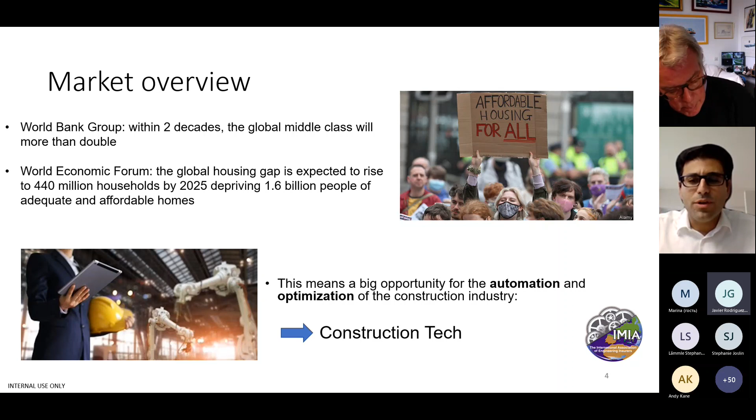World experts expect a huge surge in demand for housing in the next decades. In just the next few years, the world needs 440 million new homes. This represents an immense opportunity for the construction industry to refresh itself and join other sectors in the era of automation, digitization, and optimization. Thus, the new buzzword, construction tech.

Construction tech is particularly tangible thanks to the new workforce entering construction, a generation of workers that are tech-savvy and eager for new innovations. In 2018, more than $1 billion was invested globally in construction tech, according to Jones Lang LaSalle. In the past few years, investment in construction tech by far outpaced overall tech startup growth.

We are here talking about artificial intelligence, big data, building information modeling, bricklaying robots, drones, and our topic today, 3D printing.

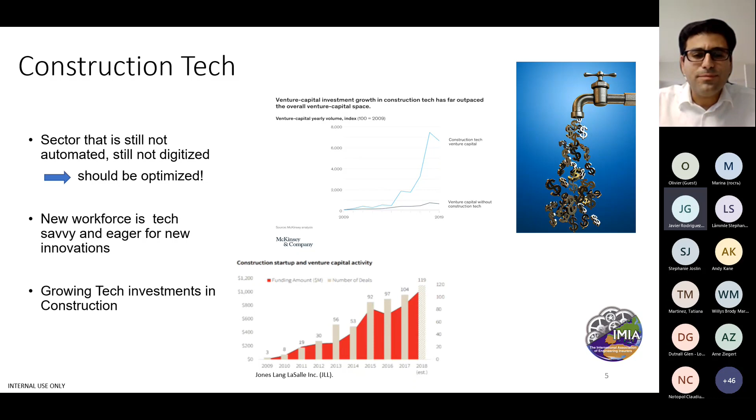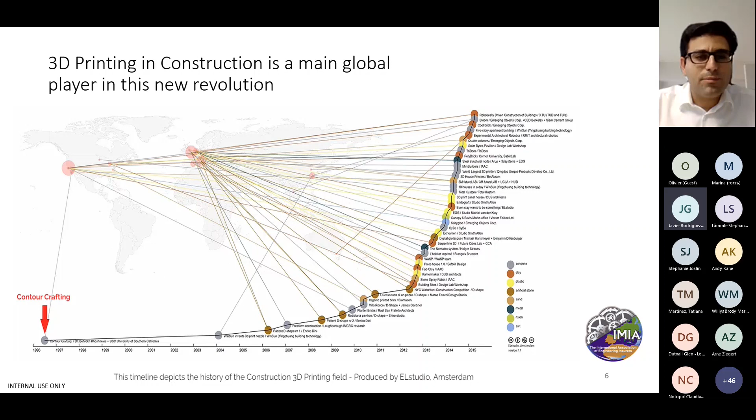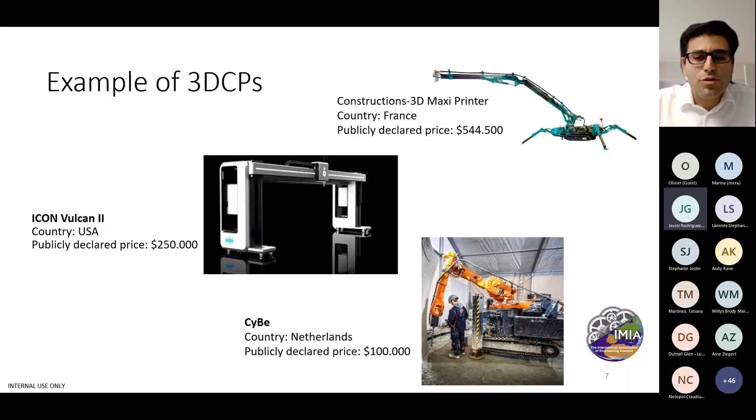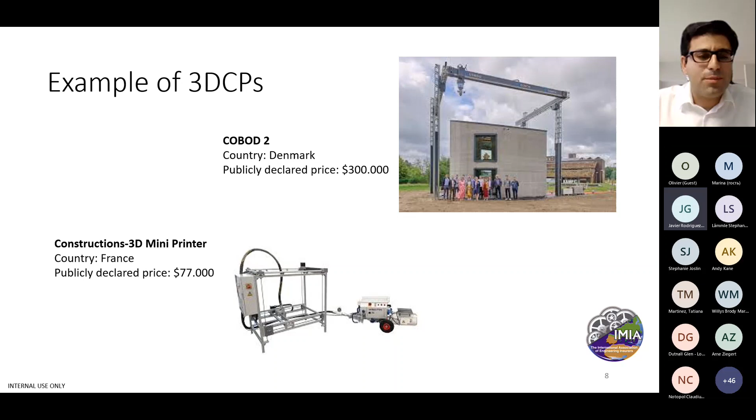So as one can see, there's a lot of interest and activity in this space. However, it is not without its challenges. I'd like to touch a bit on some of these challenges here, which are typical for any new type of innovative technology at its nascent stage.

As we've seen in previous slides, those machines are still expensive for the average cement subcontractor, and that is maybe why this new technology is not immediately adopted by them. These challenges are being addressed, of course, and each day there are improvements in the 3D cement printing space, but it is still not problem-free.

In the next few slides, I'll address the issues of cost saving, and I'll do that by first comparing 3D printing in manufacturing to 3D printing in construction.

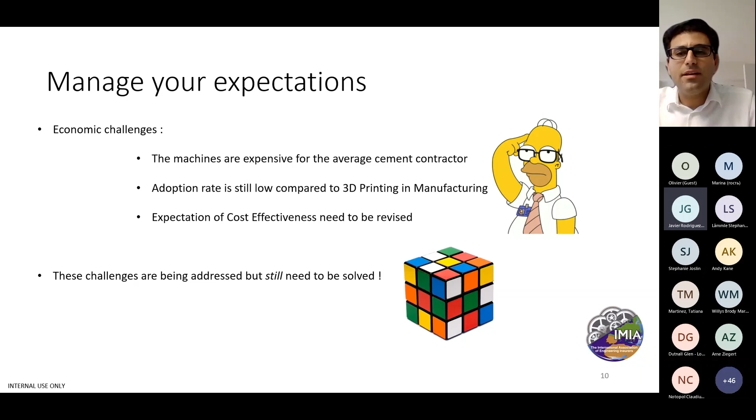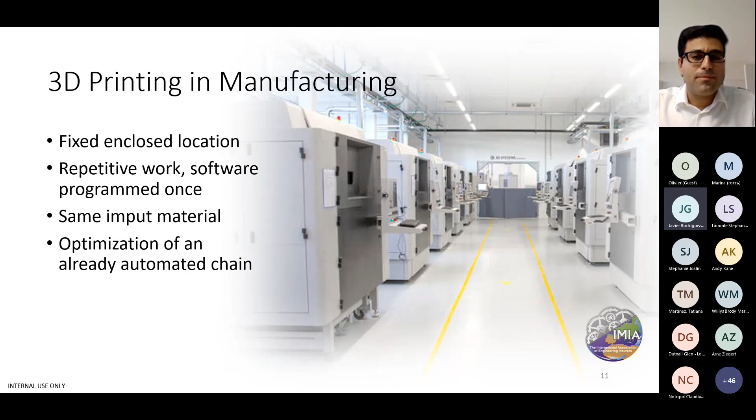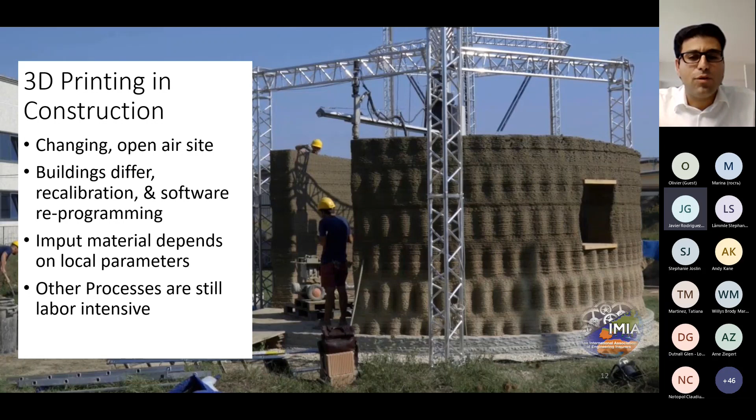Well, that is not the case for the construction industry. First of all, the printer would have to be transported and set up over and over again for every new site. It's out in the open, in rough and rugged conditions, and vulnerable to nature. For each new structure, the printer would need to be recalibrated and the software reprogrammed. Only the cement pouring part is automated in construction; a lot of the other processes are still not automated and still need human involvement. Therefore, optimization is still a few steps away.

Theoretical research on cost and time will tell you that 3D cement printing is extremely effective. Unfortunately, some current academic research, but especially online articles, are filled with hyperboles and sensational rhetoric.

I talked to the customer relations managers at Cobod, a more serious and successful 3D cement printing maker, and they admitted right up front that it is still more expensive today to print cement than it is to pour it. He joked about how some of their competitors falsely advertised the cost and time effectiveness of 3D cement printing, and then got flooded with phone calls from people asking them to come over for the weekend to print an extension of their home in the backyard for $4,000.

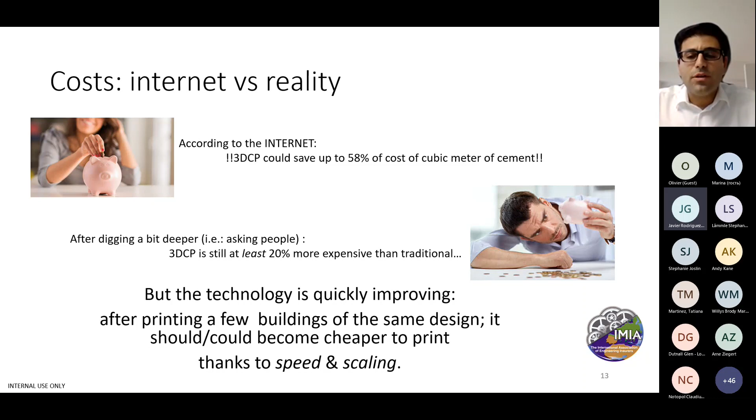The technology is obviously still not there, and this misinformation hurts an otherwise healthy, growing new technology that just needs its time to properly develop and find its space in the construction sector. The technology is still improving, and after printing several identical structures of the same design, you start benefiting from economies of scale, and it should become cheaper to print than it is to pour cement.

This graph shows how steep the interest in 3D cement printing is developing. Despite the challenges, it's still quite a sensational growth. Cobod, one of the more serious companies building 3D cement machines, which was able to already have a cooperation with GE to print wind turbine towers, is receiving on average around 1,000 inquiries per month. He admits that the hit ratio is still very low, around only 0.5 percentage point conversion rate. However, the interest is definitely out there.

As it is typical for successful startups to have such an exponential year-on-year growth, especially in their early stage phase, they are selling about 8 times this year what they sold last year.

I believe that in the short and medium run, 3D cement printing will give birth to a new category of specialized cement subcontractors, those that manufacture parts of the structure off-site. I use the word manufacture here to draw a parallel with the manufacturing companies that have so successfully adopted 3D printing. The next long-term step would be the widespread adoption of 3D cement printers by the average cement subcontractor, once it really becomes cost-effective.

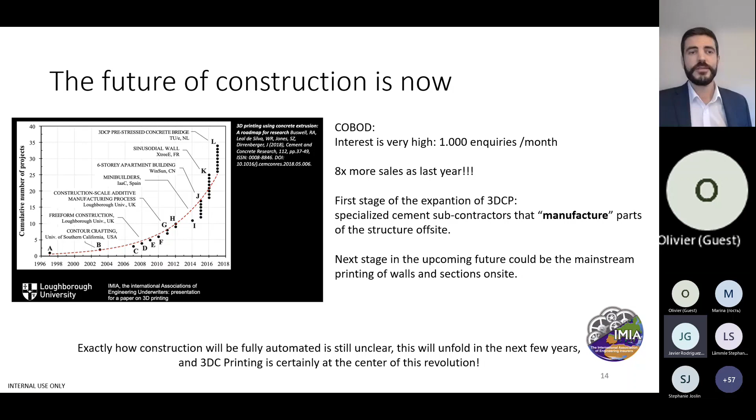When we first started researching, we saw a lot of different definitions, and it was a bit confusing how to actually define construction 3D printing. So we decided to go high level and found an ISO, an international standard on 3D printing, which obviously covers more than just construction 3D printing. It covers all types of 3D printing. There's a definition there, which basically talks about deposition of material.

Also defined is additive manufacturing in that paper, which talks about joining material. We found actually that these two terms are used interchangeably. So a lot of the times when we're talking about 3D printing, maybe something's not being deposited, but it's being joined, actually we're talking about additive manufacturing. But even this ISO standard itself talks about the term being used interchangeably.

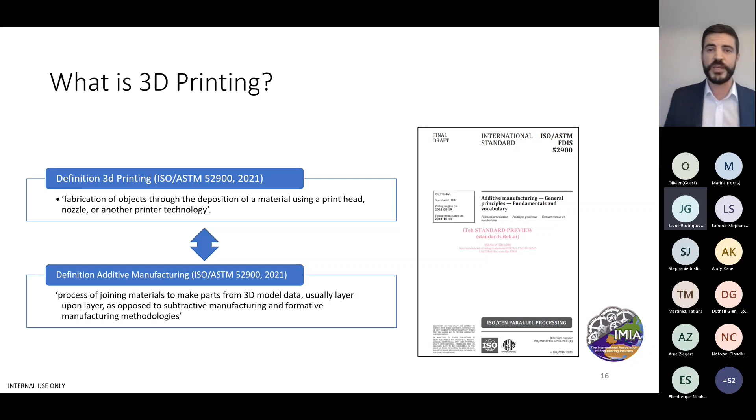That definition helped us out, but then we saw lots of different types of 3D printers and materials, and even just in the group discussing it, we had a hard time trying to fit in the different pieces. So the next slide shows us a bit of an overview of how we classified it. There's no general agreed standard how to classify it, but we found basically 3 main areas.

You can either classify 3D printing for construction by the materials, so either something that's cementitious or aggregate based, plastics or metals, or you could classify it by the printer type and setting - meaning is it a robotic printer, is it a gantry printer, is it on-site or off-site in a factory. And then finally, the last classification we saw was the technology type of the printer.

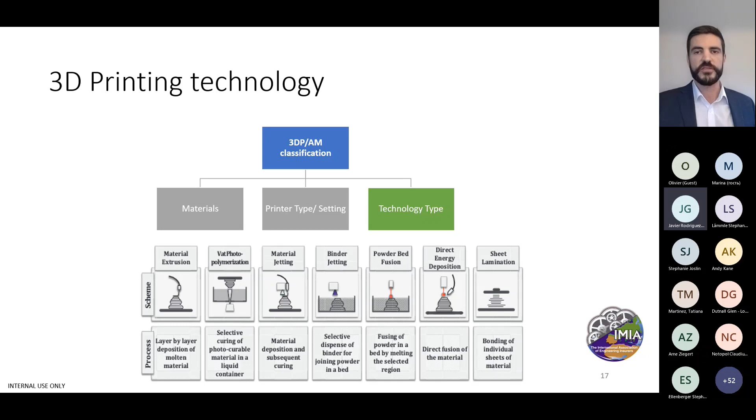One of the main areas we see in construction 3D printing is material extrusion. There are also different types of printers that we can classify based on the materials. The primary one we're looking at here is cementitious or aggregate-based materials, so it doesn't have to necessarily be cement. It can be clay, or even organic material used to form that extruded material.

One point there: it's a term that was coined back in the early 1990s, contour crafting, which relates to when the material is extruded from the print nozzle, and there's a trowel you see in that picture, that yellow bit of plastic, that then forms the external surface of the concrete. But there are countless other types of extrusion printers out there, and each company has their own setup and design. That's the one we're going to talk about mostly today.

Some other extrusion printers use polymer and different types of plastics, and a term there is big area additive manufacturing. Basically, you can think of it like those small 3D printers you see in shops—these are just giant versions of that, extruding thermal melted plastic to get your extruded material for construction. Generally the size here is also limited, so it'll be precast in a factory, then transported to site, maybe used for facade elements and the like.

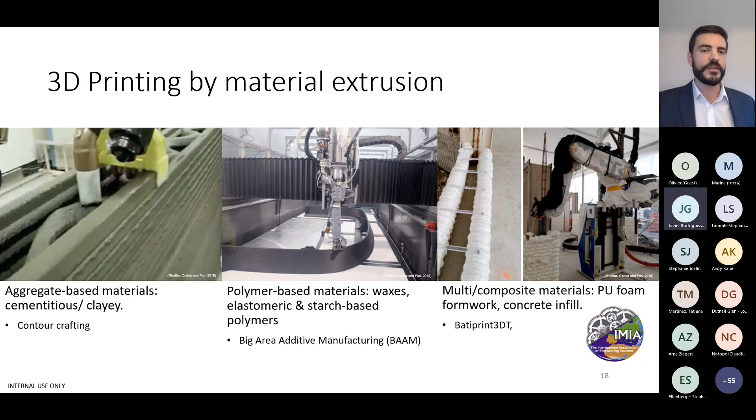So those are the 3D printing types we see with extrusion. There are other 3D printing types of construction talked about in the next slide, and one of them is binder jetting. This is a bit different—it uses a bed of sand, and even some cement is sometimes included.

The 3D printer then goes across this layer of sand and either adds some steam to bond the areas that need to be 3D printed, or adds some type of adhesive or emulsion to stick those pieces of sand together, then deposits another layer of sand and keeps doing that until you end up with your full structure. The picture on the right shows something used more for creative artwork type structures, but we've also seen binder jetting used for bridges. So there's some potential there, but obviously the size of the printer and the members that can be printed are somewhat limited.

Powder bed fusion uses similar technology, but rather than a sand and cement mix, it has a sand and metallic or steel mix. The printer head fuses this material together with extremely high heat, and you end up with a metallic 3D printed structure. For example, here we see a picture of a space frame node created with this process. Interestingly, and we can touch on this later, 3D printing allows a lot of these complex forms that aren't able to be made with traditional casting. Using current technology, they've actually optimized this design using stress and strain, took out everything that doesn't assist in the structural performance, and ended up with a shape that looks slightly organic. So that's powder bed fusion.

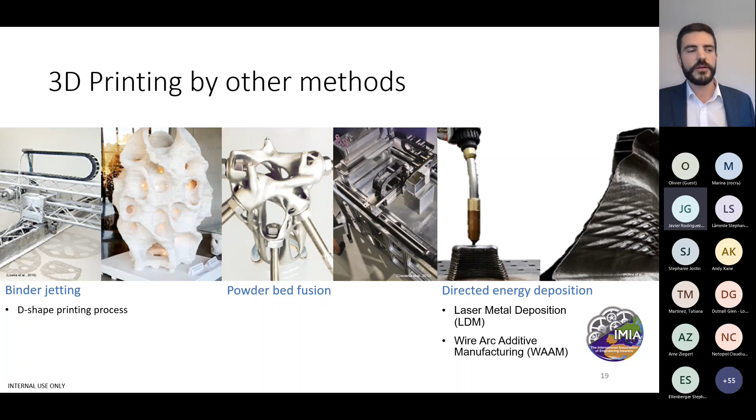There might be an algorithm that goes across and gives you 80%, but there's some manual labor involved that says, alright, it doesn't make sense for the toolpath to automatically move from one corner of the building to the other corner. So they'll make some modifications and adjustments there.

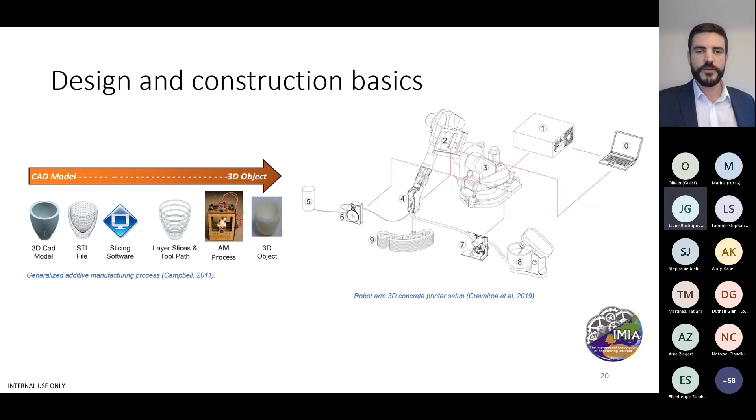The next slide talks about some of the key challenges involved here. There are two parts, especially regarding the cementitious extruded 3D printing technology: one is the cement mix, or cement concrete mix, which is a lot more specific—we'll go into this in further detail—than your standard Portland cement 25 MPa mix that you order from your pre-mix concrete factory.

But the other part is reinforcement, and getting this done automatically is quite interesting. There are different methods to include your reinforcement. If you remember your basic engineering, concrete is good in compression, but you need reinforcement to give it the tensile capacity and ductility. So let's just park those two things—those are the two challenges associated with the materials that go into 3D printing.

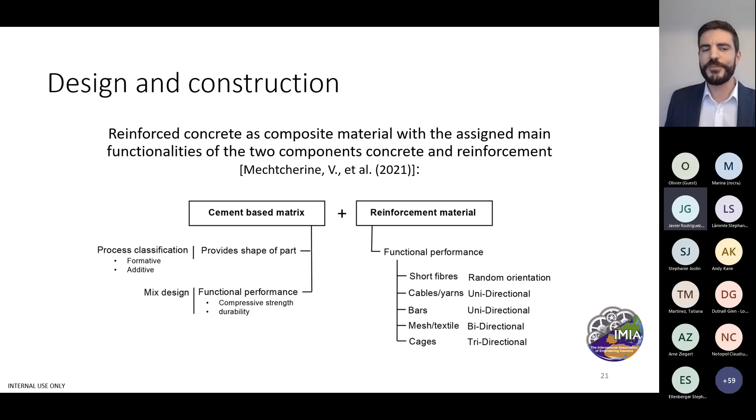But then the next slide points out some of the process challenges with the technology. These are things like not just in terms of the reinforcement, but then the next slide talks about automation in general—is it just plug and play?

Is this a setup where your experts on the field can push print on the computer and the 3D printer just runs by itself, or does there need to be manual intervention? Does reinforcement need to be added manually? Do the hoppers need to be added, that sort of thing? So the more we can move to automation, the better it gets, but the more complicated it gets.

There's this point about geometric freedom, which basically means if you have a robot arm 3D printer, it might be able to do the corner of a house, but you'll probably have to move it to the other corner because the radius of what it's able to reach isn't that high. The flip side is if you have a gantry mounted 3D printer, it takes a lot longer to set up, mount your gantry and cranes, but once that starts going, you have the full geometric freedom to finish the house without having to set up again. There's a point there about process speed.

It's quite critical that your concrete doesn't get extruded too fast, which doesn't ensure your layer and smooth profile of what you're extruding. But if it goes too slow, your concrete might clog up your nozzles. So there's some aspects involved there which are quite complicated.

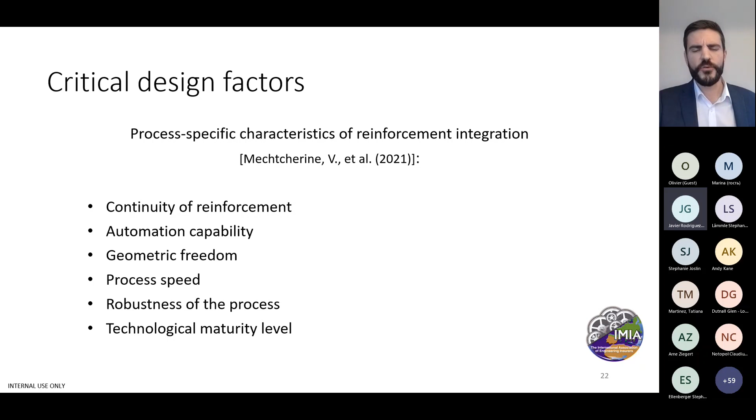We touched on this before, and there's aspects of concrete that talk about flowability, your early strength, and making sure that when the next layer goes on top of the old layer, that it's strong enough to support that layer on top and the weight on top. Otherwise, you'll get quite early failure in that.

The way it happens on site, there's a lot of research on this as well and a lot of papers being written, but it seems to be quite an iterative process. That means the designers will come up with a mixed design with different additives, super plasticizers, accelerators, and all those sort of things to make sure the mix is just right. But then once you're on site, there's different conditions, humidity, sunlight, and all that sort of stuff. So it's an iterative process, which means they have to do a lot of tests, check to make sure it's fine. And even during casting or 3D printing of a structure, they might have to make small adjustments to the printhead, to take extra water cement ratio, or add more additives, or remove the additives, just basically based on how it's working.

The interesting thing is that there are some concrete and cement providers who have said, okay, we know what the industry is going towards, we'll provide a somewhat standard mix. But again, as all the different providers of these 3D printers have their proprietary systems, at the moment it seems like everyone's just working on their own special concrete mix. But at least it's working, and there have been lots of case studies with concrete mixes getting these structures done. That's not necessarily the case with automatic installation of reinforcement.

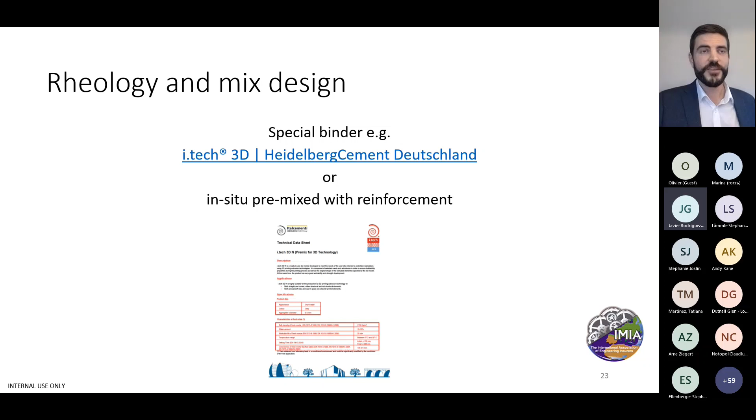So the next slide shows some of the difficulties there. At the moment, what we're seeing is that the reinforcement, whether it be a mesh or a steel bar or some ties that just connect the two different sections together, that is being done manually. So there's manual labor going around, including the tie rods, as the 3D printer is working, which sort of defeats the process. We want a fully automated system that just prints house after house.

So there are some different methods being looked at, whether it be including a parallel steel wire during the casting with a spool, or adding different smaller fibers inside the extruded material to give it that tensile capacity, or other things that just shoot the bars in while it goes along. So there's different things being investigated, more so at university level, and I guess in conjunction with the main 3D players, because this challenge is probably the main one everyone is focusing on: how to get the reinforcement process also automated.

So that sort of shows it in terms of the technology part. One of the biggest challenges, though, doesn't have to do with the physics and the engineering. The biggest challenge is the standards and regulations.

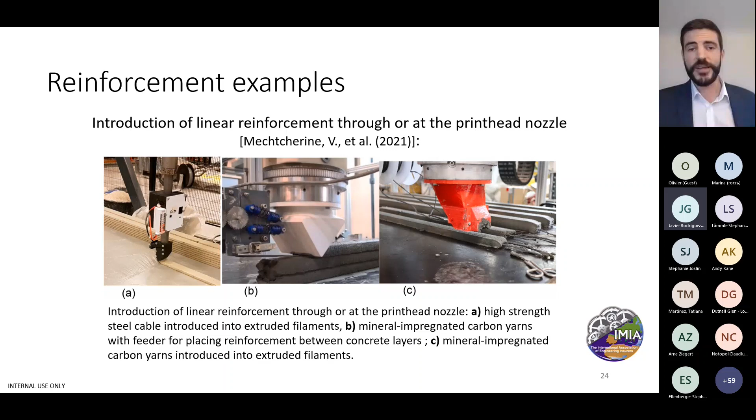What the issue is that a lot of the standards and regulations around the world don't exclude 3D printing, so that's the good thing. But they don't necessarily have special standards for buildings that are made through 3D printing process.

So what generally has to happen is that the developer, in conjunction with the 3D printer, have to go through and get a building approval demonstrating that the 3D printed house meets the standards and regulations in that region. It's just the standard ones that any other house would do.

And the challenge there is that there's no experience on the side of the government that's approving this, so it'll be brand new. There's also not a lot of experience. It's starting to build, but with the consulting engineers.

So the consulting engineers that will work for a 3D printer and demonstrate through their finite element method that the ultimate strengths of these walls are adequate, that's all fine. But then on the authority side, they don't have anyone there to be able to say well, is it fine or not? So that's probably the biggest challenge.

There are some ways that the main regions in the world are trying to deal with it, and the one that's probably the most proactive is this ICC standard, the International Code Council, the ICC. So they've proactively said we need acceptance criteria that helps these 3D printing developers demonstrate that they meet the International Building Code, which is that model code in the states, so that in USA the different states then can accept or not.

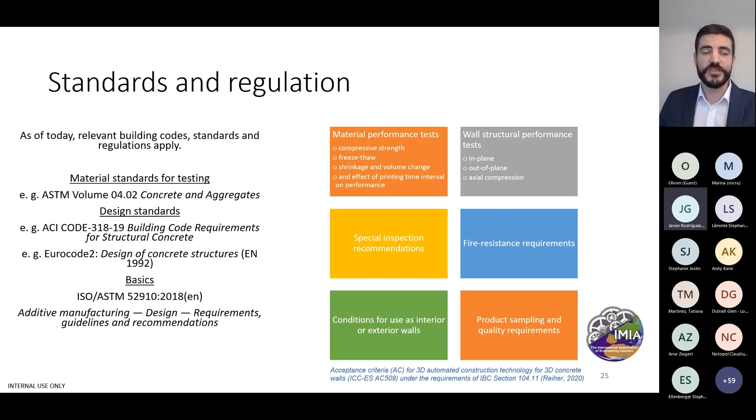Now, another important factor here that I just want to touch on is sustainability, which in this day and age cannot be left out. So we've looked at that in terms of your standard triple bottom line: environmental, human, social, and economic. And we found that it's not a clear cut where you say, okay, 3D printing is definitely sustainable and it's gonna solve everything.

It's a balance, right? So obviously we discussed this lower costs in the previous section. So hopefully we'll realize that in the short to medium term, and that would be great. So that will provide access to more social housing and provide access to housing at all if that gets achieved.

The other part is that due to the less material that's used with 3D printing, it's generally always fairly optimized as opposed to just cast in situ concrete. Therefore, you have less CO2 emissions. So there's a big plus there.

The other point is because you're not having this formwork and other sort of temporary works involved with 3D printing, there's also less waste, which also reduces CO2 emissions in that case.

When you automate these processes, obviously you have some human social benefits, so reduced injuries and fatalities on construction sites. And with time savings, the comment there relates more to being able to quickly build houses for any sort of future, let's call it disaster events or humanitarian events. So that's on the positive side, or maybe on some of the sides that still need work.

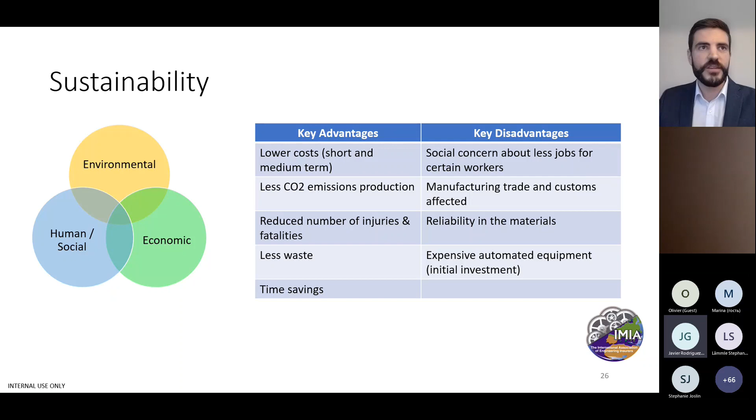So that's just a few points in terms of sustainability, and we're going to finish up my section just with some key case studies and flagship projects.

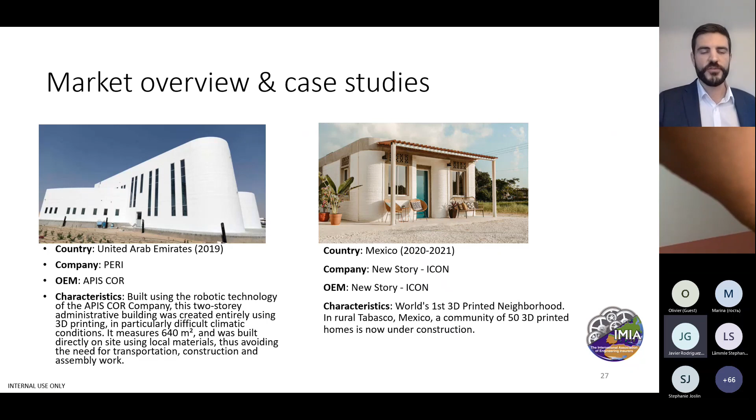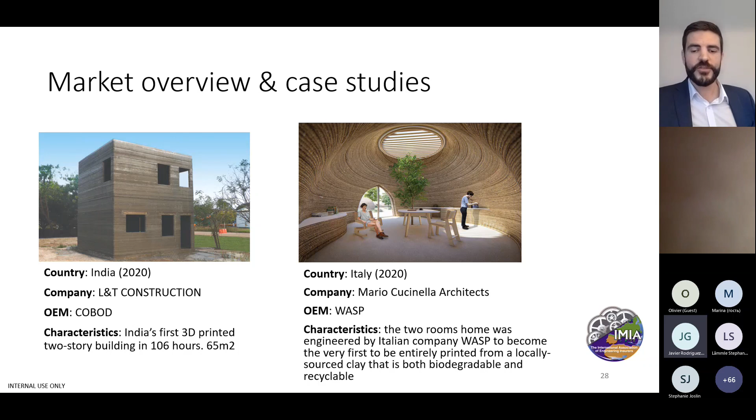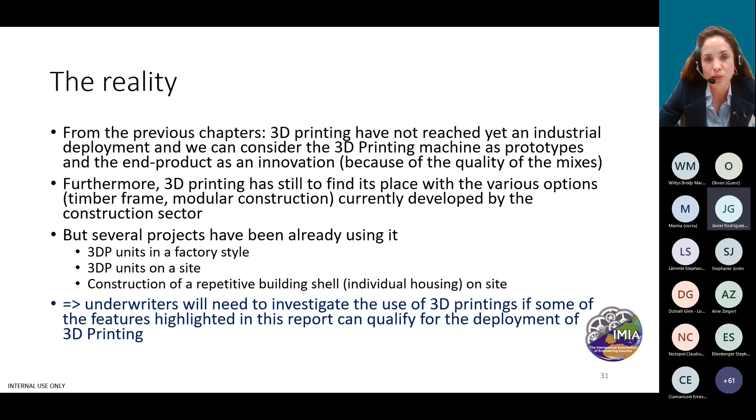So this is not only a specific topic for engineering underwriters, but this will also impact other kinds of policies. We can have construction and erection policies, IDI, construction defects, general liability, and also PI and cyber.

So the main points to be considered, for example, in a construction or erection policy, we should consider the experience of all the involved parties, also the specifications of the projects, and also QA/QC procedures. In the case of 3D printing, we are not sure about the durability of these structures, so the life expectancy will be something not clear yet and something challenging for this kind of policies.

The same for construction defects. This is a more specific policy in the United States, where they are used to work with timber frame, and where this 3D printing technology will be something quite new. Regarding liabilities, general liability policies, it's also something unclear, the responsibility between the parties. Here we have, for example, the software designer, the printer designer, the mix supplier, the contractor, and it's also not clear the performance of the structure in the future. So these kind of policies will be challenging too.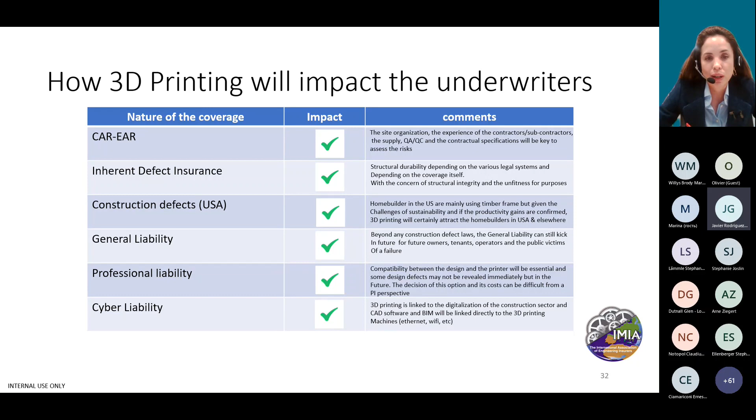And in previous chapters, we have seen a lot of examples for housings, but I would like to say that this is not the only kind of projects that we can have with 3D printing technology. We have here two real cases for two small bridges. And we are not sure, but probably these projects have been included in our clients' programs. So that's why the underwriters should be aware of the technology and pay attention to this new technology, because probably they already have the technology and this kind of projects in their portfolios.

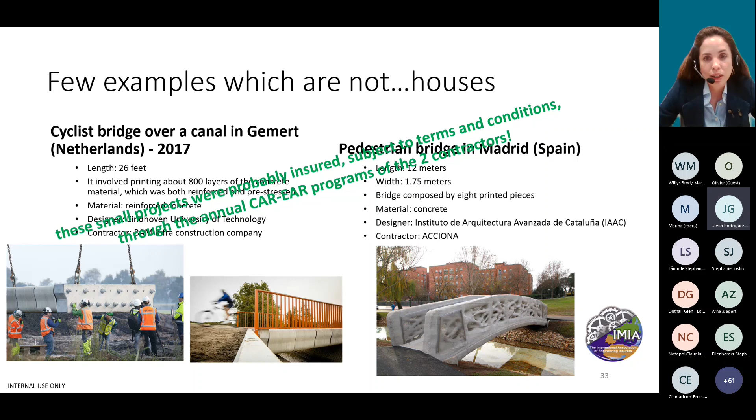So, in the next slide, Mohammed, please.

Yeah, so it is true that when we want to learn about a specific technology and how to analyze it from the insurance perspective, we look at the claims, but in this case we have a lack of data, and that's why we have worked on different scenarios. We want to distinguish between two phases, the construction phase and the post-construction phase, and look at different issues we can find. During the construction phase, we can find defective mix, printer malfunctions, or even issues with software compatibility. And during the post-construction, we can find crackings, insulation faults, or even issues with the durability of the structure.

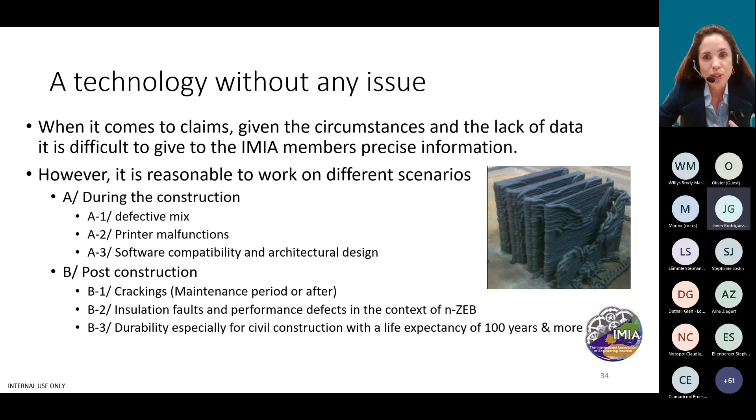So in the next slide, we want to highlight some points for the underwriters. First, during the construction phase, we can look at three different parts where we can find issues. The first one is the printed item itself, the procedure. So we can have a defective mix or any other kind of defects. That's why it's quite important to look at the design cover we want to include. We don't want to say if leg 1, leg 2 or leg 3 must be included, just to say that this must be analyzed.

And also we recommend to include a serial loss clause, as we can have several losses arising from the same event. And for that purpose, an adequate deductible will be also important in order to avoid frequency.

The second part is the machine itself. This is a very specialized equipment, and the replacement or the spare parts cannot be so easily accessed. So that's why we can have a CPE coverage for those cases where we print on site, and for those cases where we have the printing machine in a facility, in a factory. We could even have a separate all-risks policy with a machinery breakdown cover.

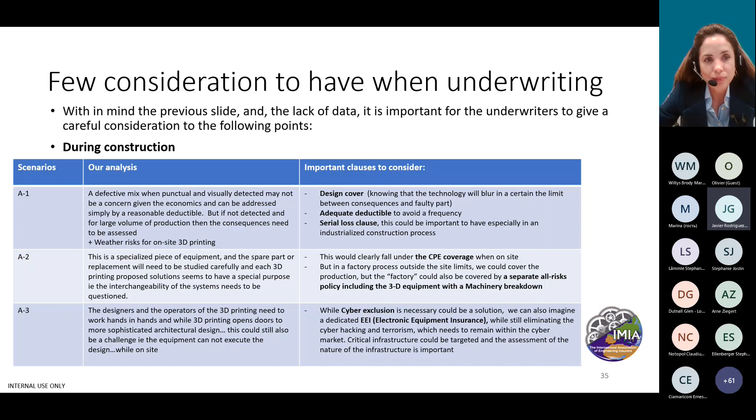On the following slide, we can see some key points for the post-construction phase. So in order to avoid finding cracking or mix defects, the QA, QC procedures, and even a risk survey is very important, and depending on the information we get during the underwriting process, a maintenance cover could be included or not. Again, we are not saying which one, but just something to be analyzed.

Another point to be considered is the possible unfitness for purpose, especially for near zero emission buildings constructed with 3D printing. This is a special topic for IDI and PI policies. And the latest are the contractual liabilities. We recommend underwriters stay away from these contractual liabilities, as the responsibility between the parties is not clear.

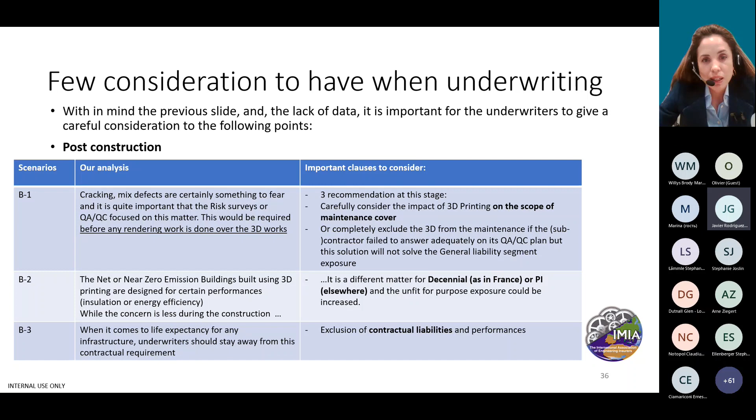On the following slide we can find some other recommendations, like, for example, delay in startup cover. This is another cover to be considered. We're not saying if it can be included or not, but the analysis should be done differently, as this 3D printing technology is increasing productivity but also decreasing timing, and underwriters should look after this.

The underwriters should look after the mix supplier and also pay attention to the replacement of the equipment. And also, with the aggregation clause, we want to say that limits and sub-limits should be aggregated not only post-construction, but also during construction. We can find defects and several losses arising from the same event, so we think this is another important point to be considered.

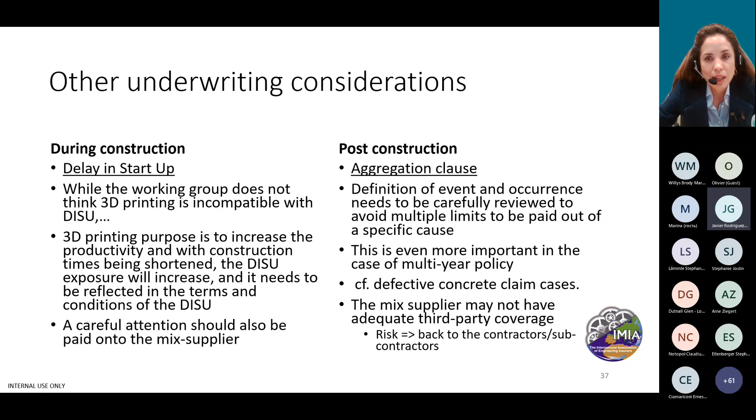In the following slide, we can see that this is not only a matter for the underwriter, but also from the risk management perspective. As we've said, QA/QC standards need to be addressed during underwriting, but our understanding is that 3D printing still follows the current QA/QC frameworks for buildings. There's no room for improvisation, so our clients should check the experience of all the suppliers and subcontractors. For example, in IDI policies, the technical inspection service must have enough experience with 3D printing technology.

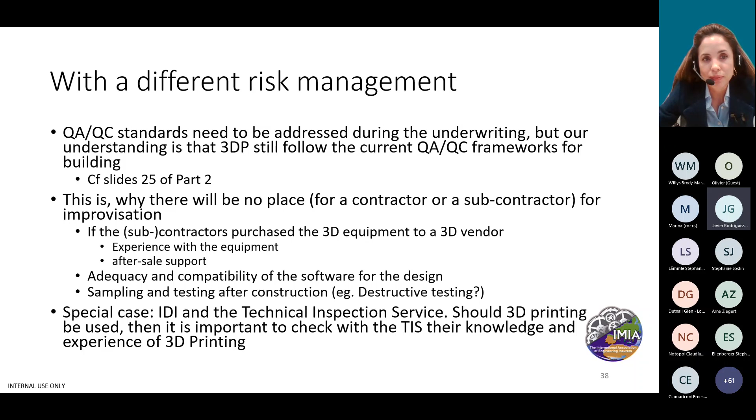So that's all for my part for the underwriting part. And now, Olivier, the floor is yours again.

So, you can understand a little bit more the introduction, in a way, that when we started to dig into 3D printing, we could see the innovation and, let's say, the industrialization process all together. For us, we had several discussions about how to approach this technology. But before we conclude, let me check. Mohamed, could you go to the next slide? So what we have learned, in a certain way, is that the concept economically makes perfect sense.

This is something we cannot deny. 3D printing will be on the market, certainly as one of the solutions the construction industry is currently developing. From a demand side there is a perfect logic there, and from the other side, i.e. the offer, the contractors, the engineers, there's also all the arguments for it. And there's also something we had to consider, which is quite the subject of many discussions today: the need to deliver on time and on budget. And basically 3D printing would certainly give more, let's say, certainty over these two items, when fully developed.

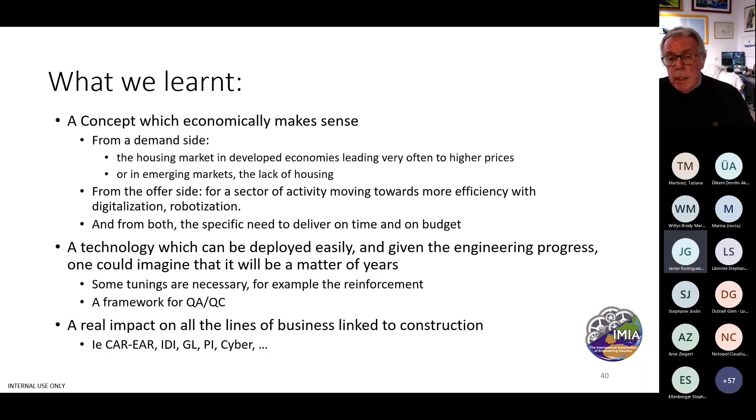Mohamed? So what we would certainly encourage the underwriters, the members of IMIA, is, with or without broker assistance, depending on the relationship, to really start to engage with the client. We've seen in this presentation that you have specialized equipment producers, COBOD. We could have a specialized product from Sika, for example, but we also have some in-house technology being developed by the largest contractors. So we need to understand how they are projecting themselves into 3D printing.

We didn't talk about Vinci or Bechtel or other big, large contractors, but we know they are working and certainly financing research on this technology. The problem is this is a kind of competitive advantage they are developing, and therefore, if they communicate through a press release, they don't give too much detail about the solutions they are currently working on.

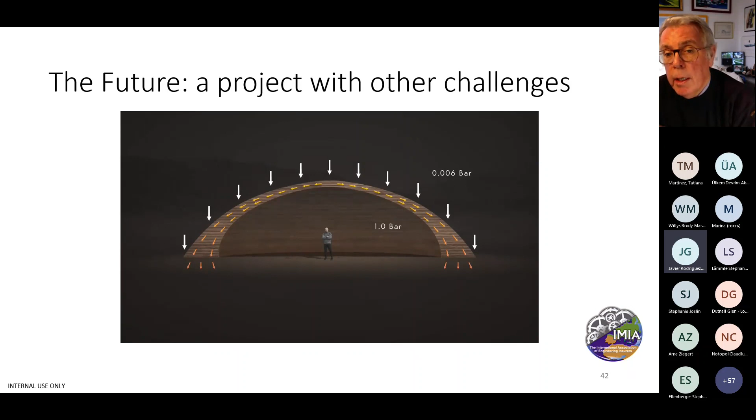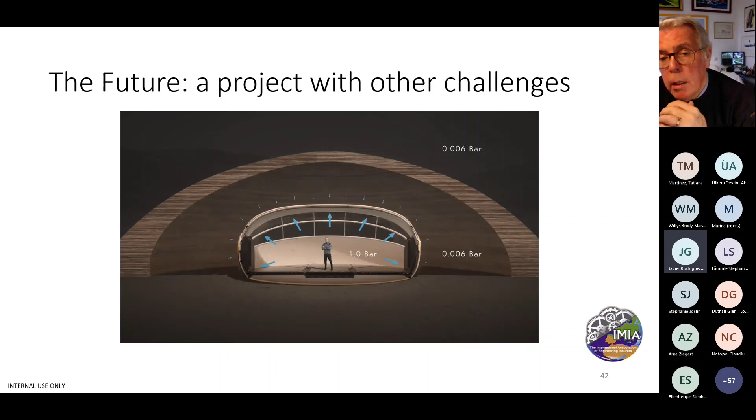And the funny thing that appeared during these competitions is that they opted for 3D printing. What you see here relates to what Brody said about the quality of concrete, and it does resist in a certain way, in a good way, for certain pressure, but not so much overpressure. So here you see a shell being built to protect the astronaut, or spationaut or cosmonaut depending on the country you're living in, from the radiation.

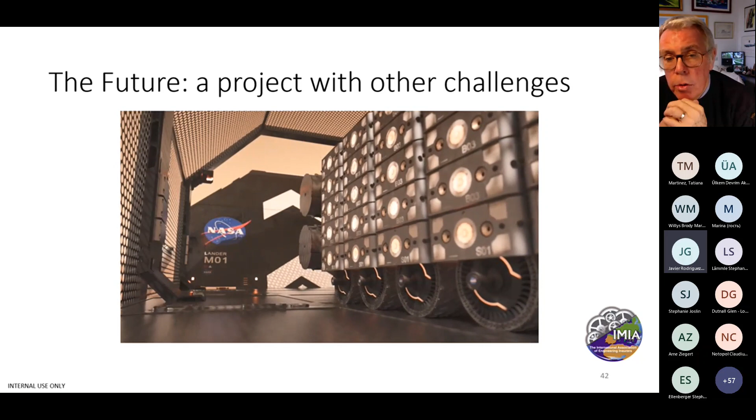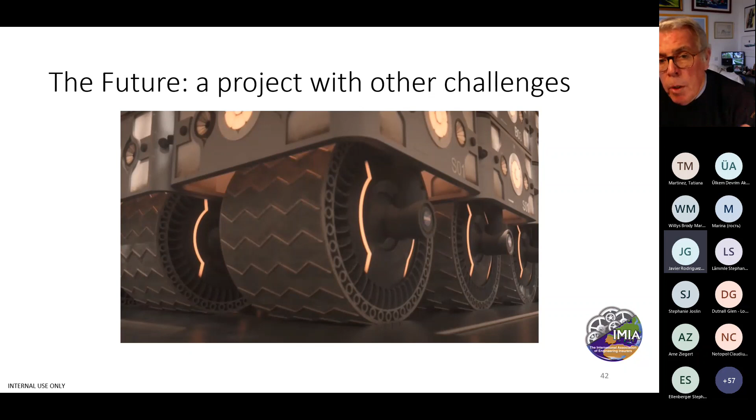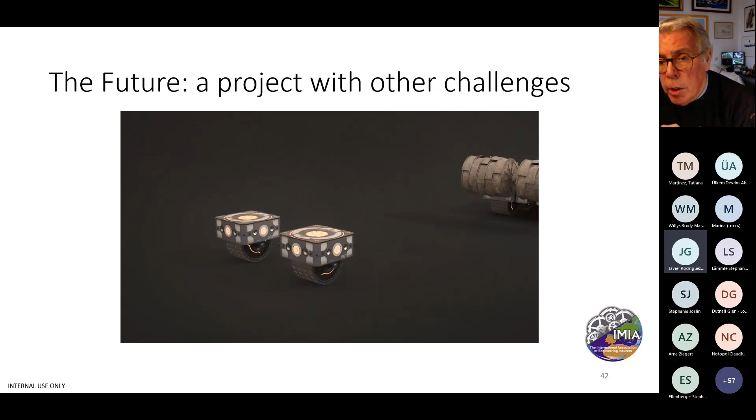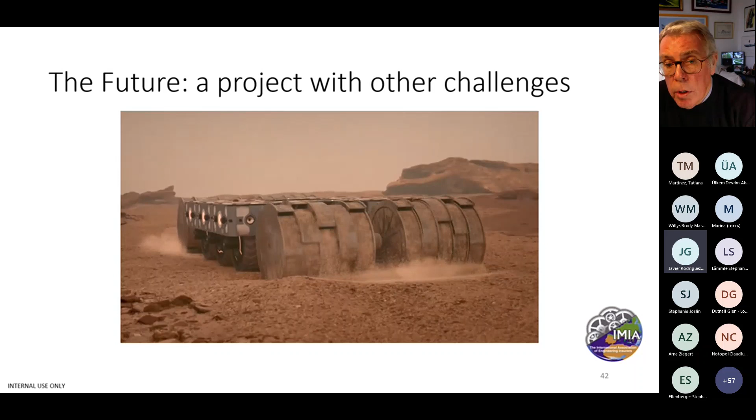And within this space you will have a laminated structure, PVC or whatever, something certainly more modern than the material I referred to. But what we see in this full movie is 3D printing with robotization, with a full set of the technology that construction is working on today. I believe it will be better quality on the website when it's posted there. But you see here some examples of robots that can recognize the topography, recognize the ground conditions, dig out the ground, treat that, and then use it with a kind of 3D printing mode to create this external shell we saw earlier.

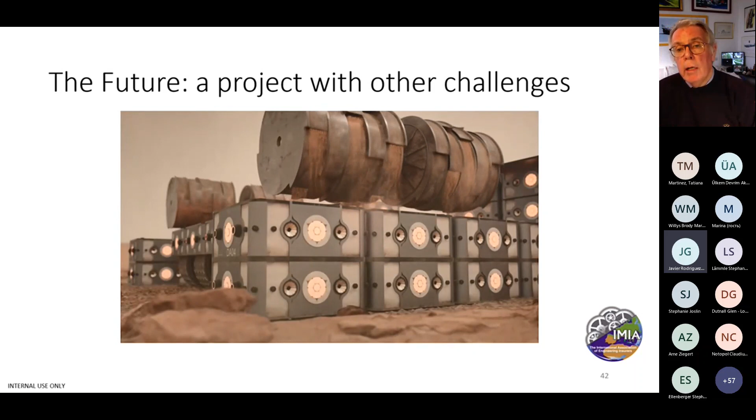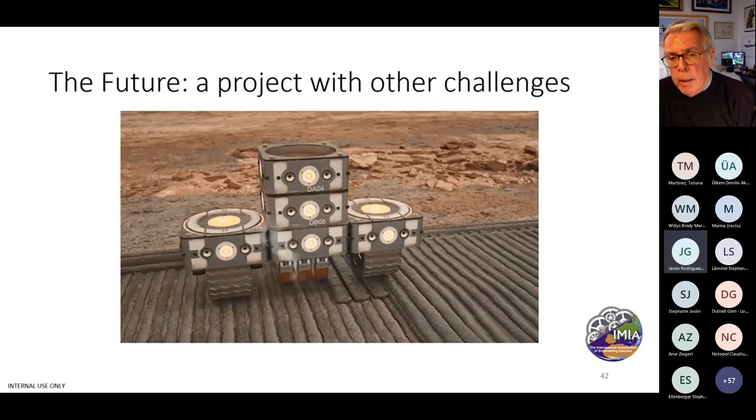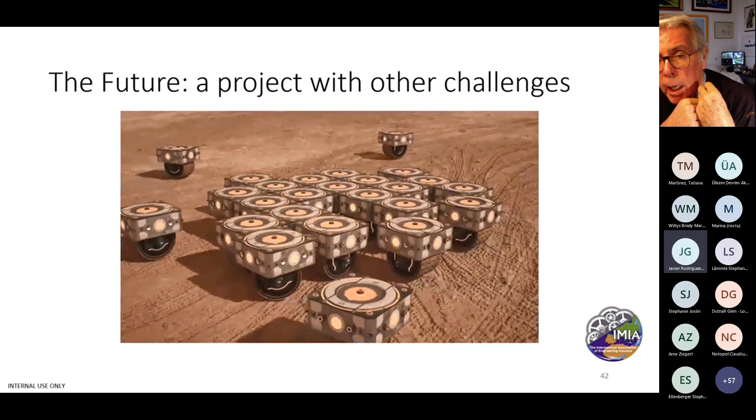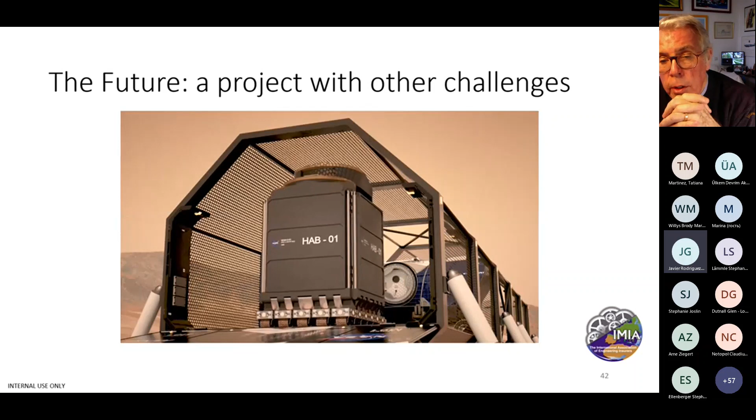This is 3D printing, for example, there. So you do see that this kind of design, which has finally been retained by NASA, is an example of where construction will be aiming, even on Earth. So we wanted to show you this in a simple manner, just for your information. But the good thing, maybe if you can go to the next slide.

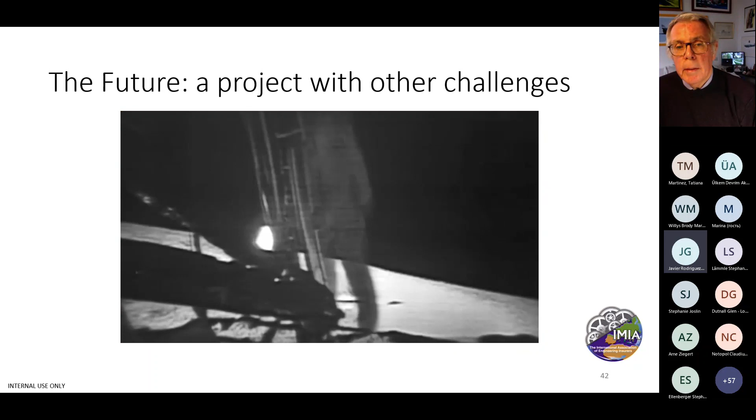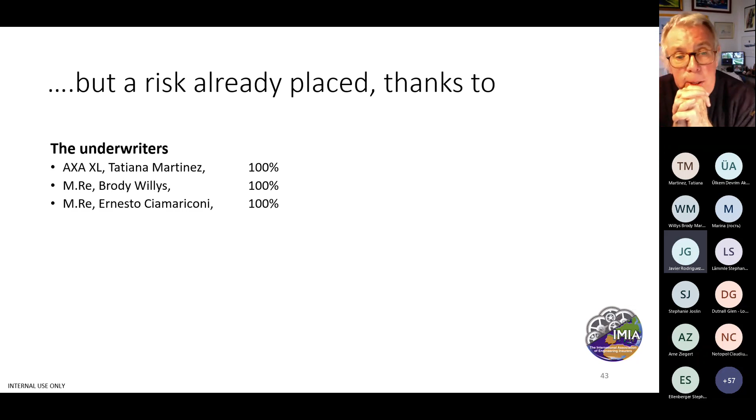So the good thing is, thanks to everybody and thanks to the group, this risk is already placed. And this is the thing I wanted to say: thanks to Tatiana, she has accepted 100% of the risk. Then we have Brody, 100% on behalf of Munich Re, Ernesto 100% of the risk, and Arne 100%.

Unfortunately, Glenn has accepted 100% when he was at QBE, so this is on the QBE book now. I know a few executive committee members will be pale, but this is for the future. And Zurich, Mohamed has done it. We have Simeon from Berkshire Hathaway. We have Rob on behalf of insurance. So special thanks. I don't think the executive committee should be worried too much about this acceptance. But I wanted to say a special thanks to the underwriters who have been working on this group.

We have not yet finished the paper, and it will certainly be released at the beginning of next year, and will also consider the questions you may have in the Q&A sessions. We need also to thank a few other external contributors. Can you carry on?

One is Richard Buswell from Loughborough University. In a certain way, Richard worked indirectly on the NASA project, and is a kind of leader in the technology of 3D printing. In the UK, certainly one of the academics pushing the technology. We have to also thank Mr. Vytautas Naslenas of COBOD. We engaged several times with different manufacturers and academicians, and this is how we got the information that allowed us to push the boundary of this working group a little bit.

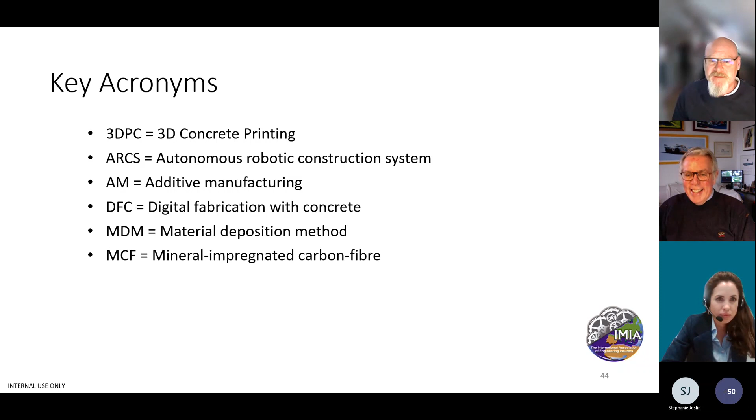But honestly and seriously, I'm also grateful for the hints and food for thought you're giving. We will take those recommendations up in the committee. I'm always very happy if we get that kind of feedback about what IMIA can actually deliver more, what we can do in addition to what we are already doing. And I think an idea like implementing a permanent working group on all kinds of innovations is certainly a good thing to do, to always keep new inventions in mind.

And of course, those working groups and the whole of IMIA actually only live and depend on the participation of all its members or anybody else who's interested. So that at the same time is a call for any people who would like to volunteer to participate in such a working group. And secondly, about the wording, I think there are many wordings which are 30 years plus old, and they all need to be reviewed and looked upon again. But it's a good point, and I think we should adapt to the needs of modern, changing construction as well.

So I'm proposing to take that up together with the LEG group. Andy Kane happens to be in the LEG group as well, so that fits very well, I would say. And maybe together we can come up with something. So again, just wanted to tell you, we are not frightened, we are not worried, and we are rather very thankful for these recommendations. So thank you very much.

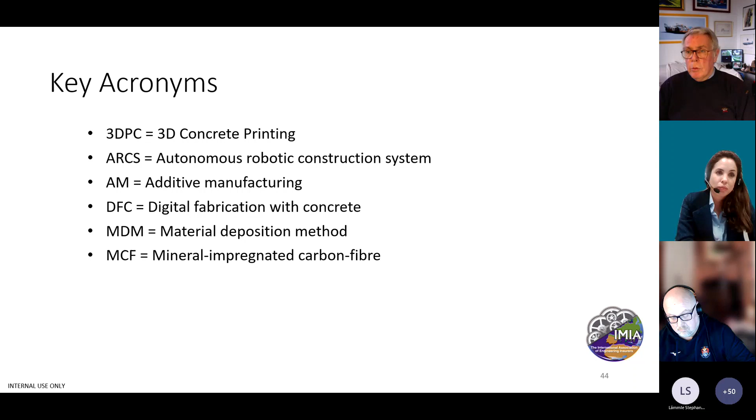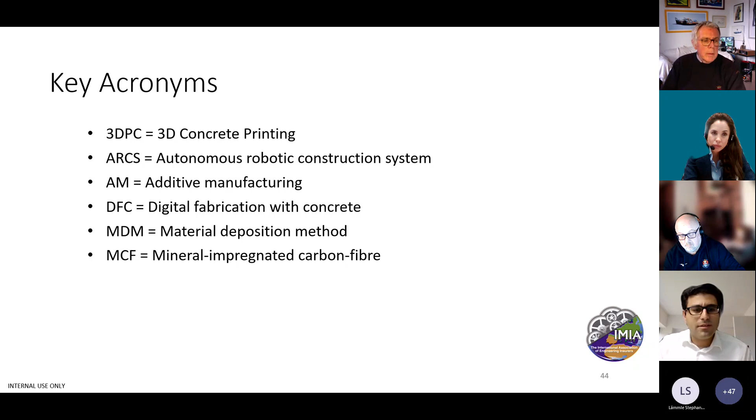I can jump in there. The reason they were looking into printing these pedestals for wind farms is that for larger height wind farms, the size of the base would be so wide they wouldn't fit on the back of trucks to transport. Constructing them in situ on site with cranes is also quite complex, especially with the form, shape, and tapering. So the idea is that if you can get a 3D printer that's self-supporting and structurally sound while printing, you'll be able to do that on site without transporting large pieces, and also achieve much higher heights than usual with wind farms.